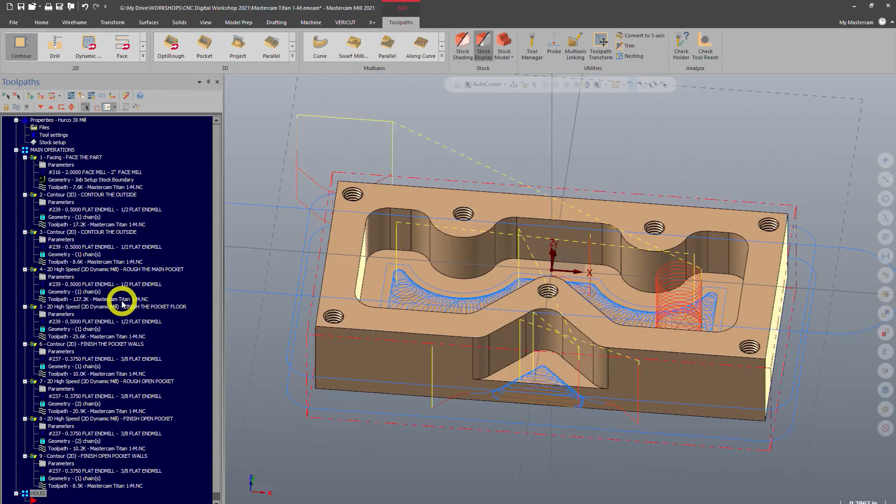The reason I'm doing this is to keep things organized and tidy, so that if I handed this program off to another programmer or machine operator, they'd look at it and know: okay, it's facing, these are the main cutting ops, and now we've got a section for the holes. It's also nice if you come back to a program you worked on a month ago—you know what everything is doing, and it's organized.

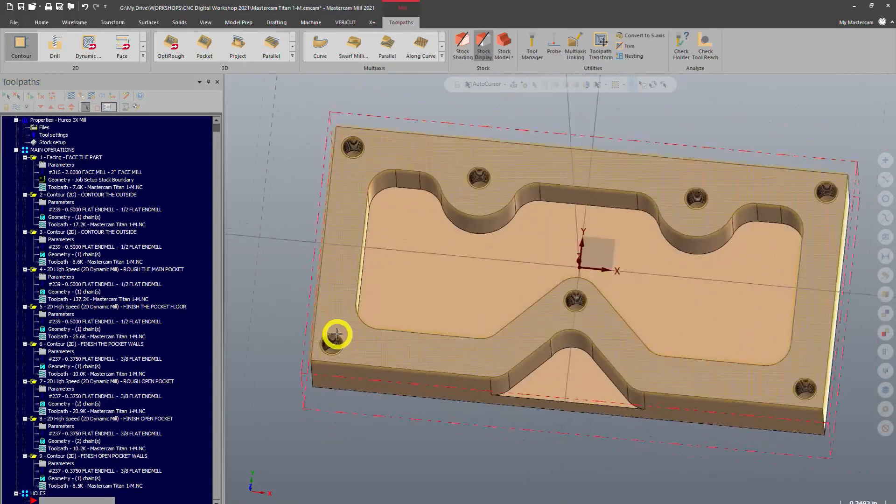So for the holes, we've got these holes over here. Based on this part model, I don't really know what these holes are or what size tap holes they're supposed to be. A lot of times you get a model brought into Mastercam and it won't even have the thread cut into the model like this. Most of the time you won't actually have threads modeled like that—you'll just have a hole.

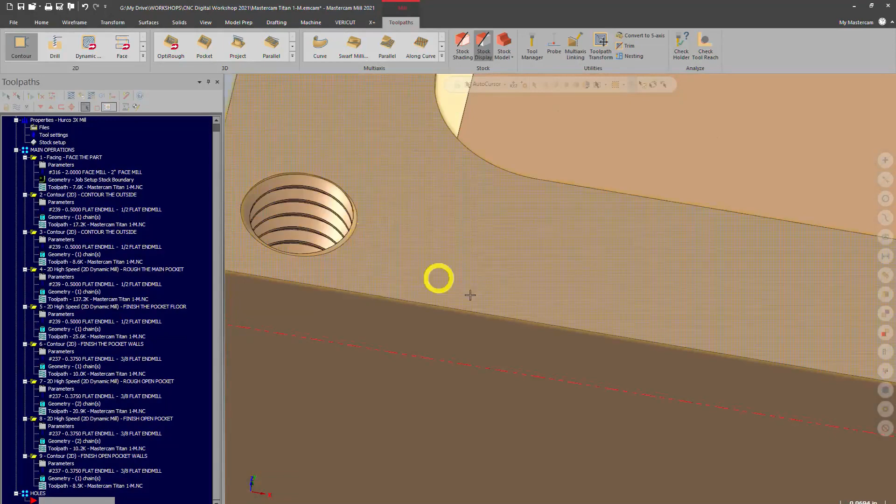In that case, it's really important to reference your drawing. We have our drawing here of the part—this is the stock page, this is a separate page calling out just the holes, and a final page calling out the pocket dimensions. Looking at the holes, we can see we've got 7 holes that are supposed to be 10-32 UNF 2B tolerance, tapped to a minimum depth of 0.380. So now I know I have a 10-32 tapped hole.

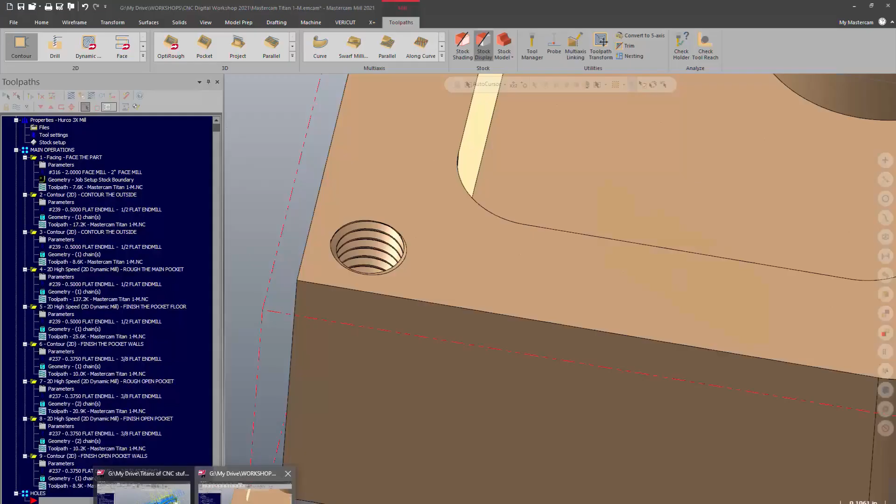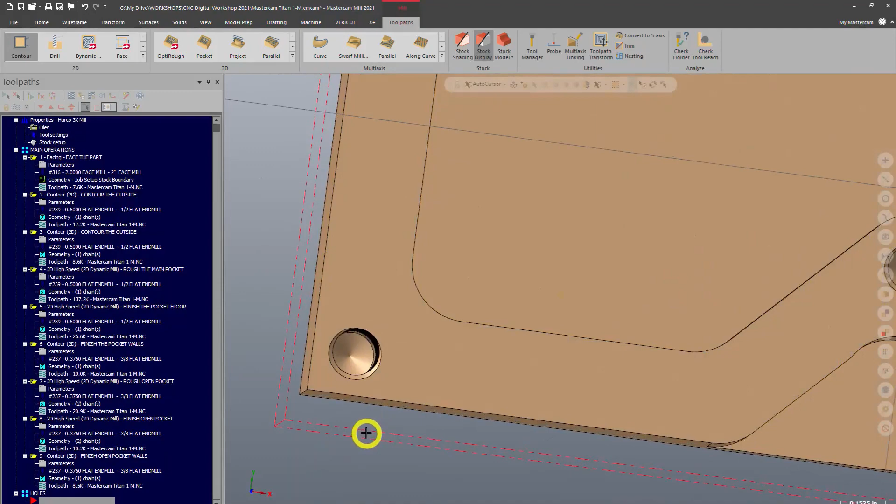There are 3 steps to tapping a hole. The first step is spot drilling or center drilling, which leaves a little V-shaped dimple at the hole entry so the drill doesn't wobble or walk. Then, after drilling the hole, you come in with the tap and tap that hole. So first we want to center drill, or spot drill, those holes to create that entry motion for the drill. Let's create a drilling operation.

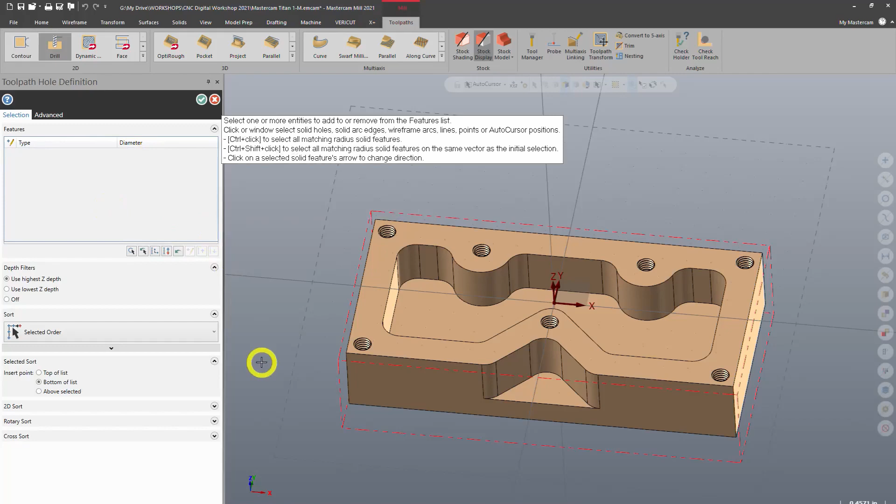This requires a slightly different selection method—we're aiming for points now, not chains. If I go down, I could drill a hole on this point, but obviously I don't want to do that. So I want to find a point at the center of this hole by going to a top view. Because this thread has been modeled into the part, I don't actually have a great point—there is one right there, but these are kind of splines, so you might not get the exact center.

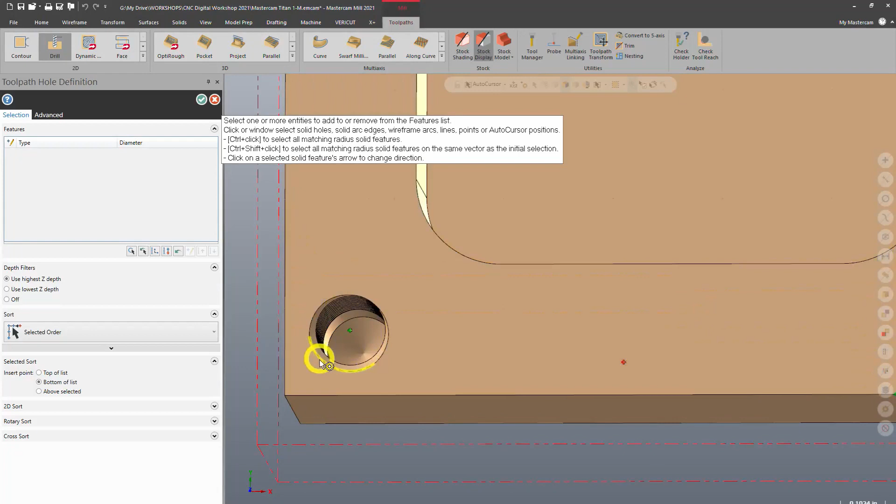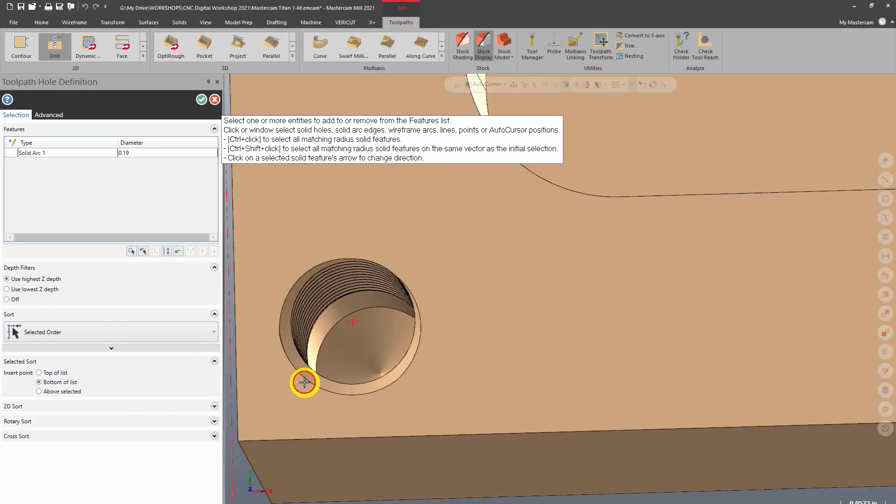A safe way to bet is to choose where you can see at the bottom here a nice clean circle. So I'll choose that point, or luckily I have found one here, so I can choose that arc. Either way will work, but you definitely want to make sure you're choosing the center of an arc. So let's go to a top view and make certain that's actually in the center of that hole.

And it is. So we're going to individually select the centers of each arc. Again, luckily we have an arc to reference. A lot of times modeled threads will not have a chamfer like this, so you won't be able to do what I'm doing, and you'll have to select that bottom circle.

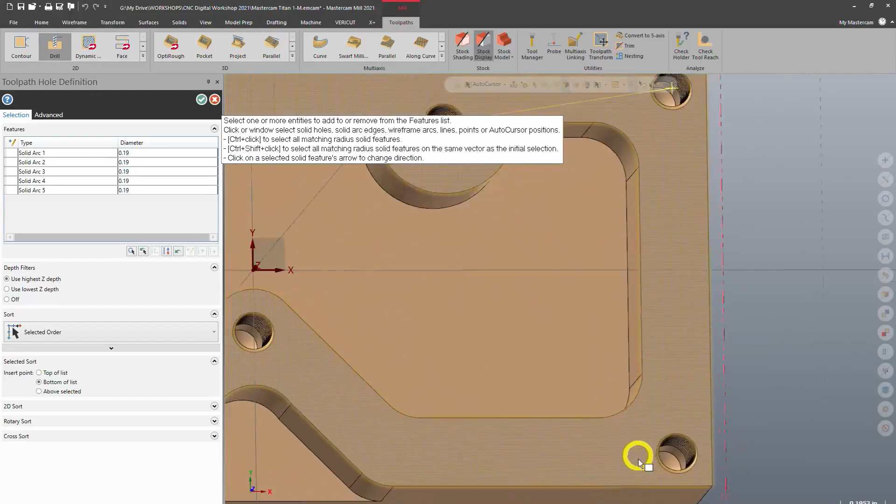So we've got all our holes selected. If you wanted to sort these in a different way, say you selected them in a random order, you can change how they're ordered here. You can have a bunch of different options. I like to select them in the order I want them cut in the first place. This is only 7 holes. If you have 30 holes, you might want to do a different selection method. Obviously I'm not covering that right now.

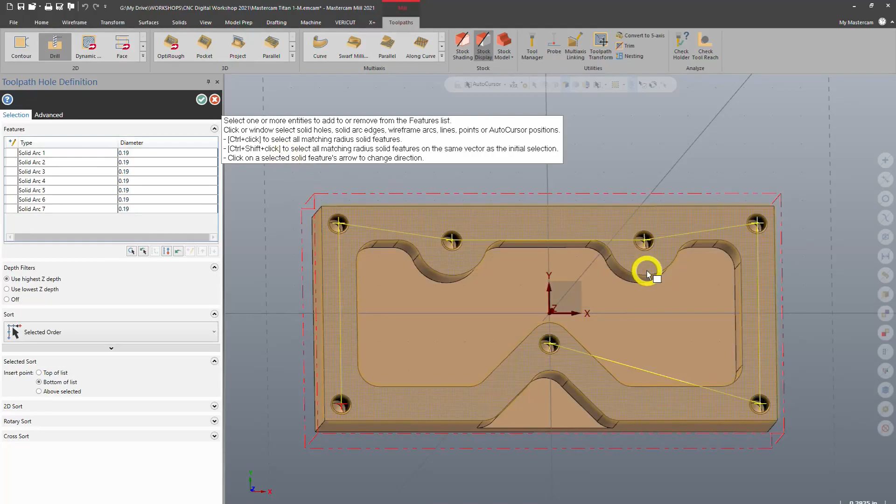So we've got these holes selected. We'll click OK, we're going into the cut parameters again. For tool, again we're not going to be using an end mill, so we're going to be using a different type of tool.

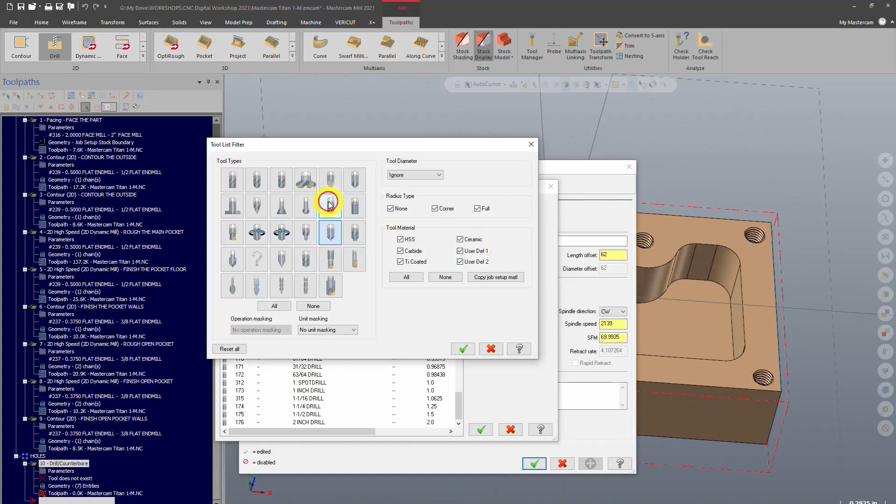Let's filter and we'll find what types we've got. So a chamfer mill, no. Taper mill, no. Spot drill, yes. You can either choose a center drill or a spot drill. I find spot drills are just easier to use, so we don't have any. There we go, spot drill. My issue here is I selected both drills and spot drills, so I'll unselect drills. We'll use a 1/2-inch spot drill.

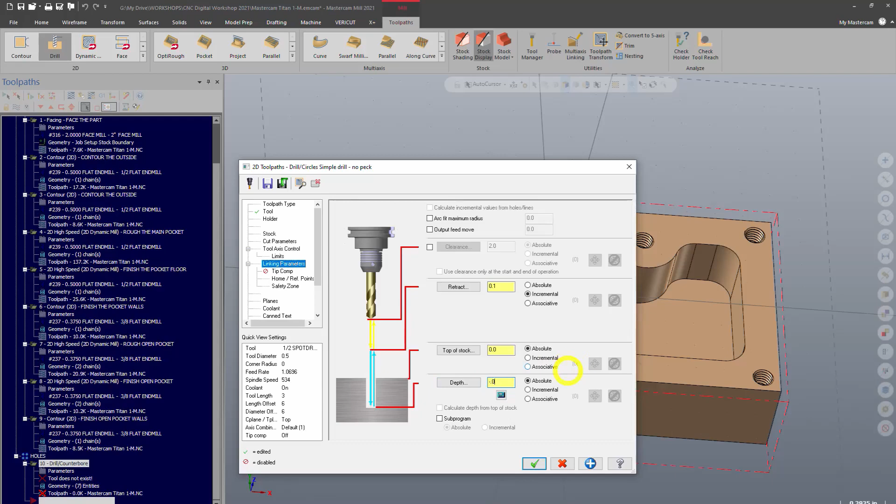And we will click and type in spot the holes. Cut parameters, just a standard drill. Linking parameters are depth. For this we'll just manually type in -0.08, and we'll see what that looks like.

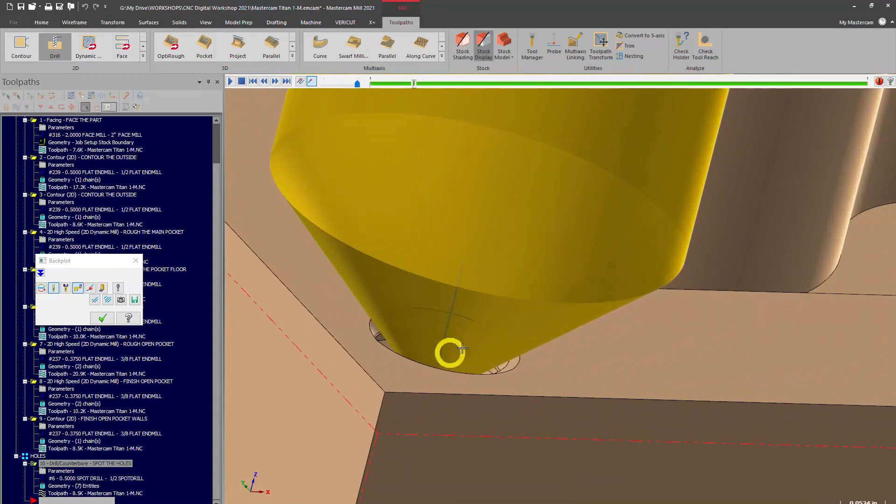All right, so let's simulate this and see. I will click the S key again and step through and see how deep that goes. So we can see we're not quite deep enough to match the edge of that, so we'll add a little bit of depth there.

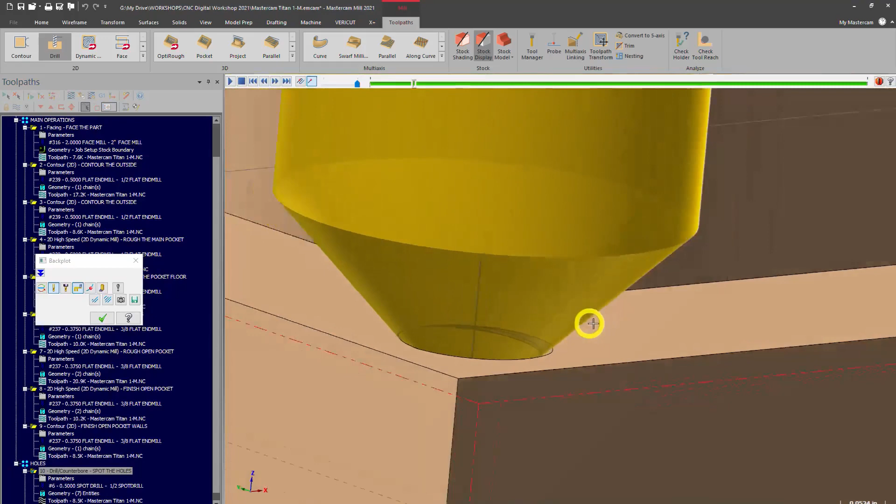Let's try -0.09. Dirty operation, so we'll regenerate, backplot, and we'll step through it with the S key again. So that's good, it's coming right down to the edge of that hole.

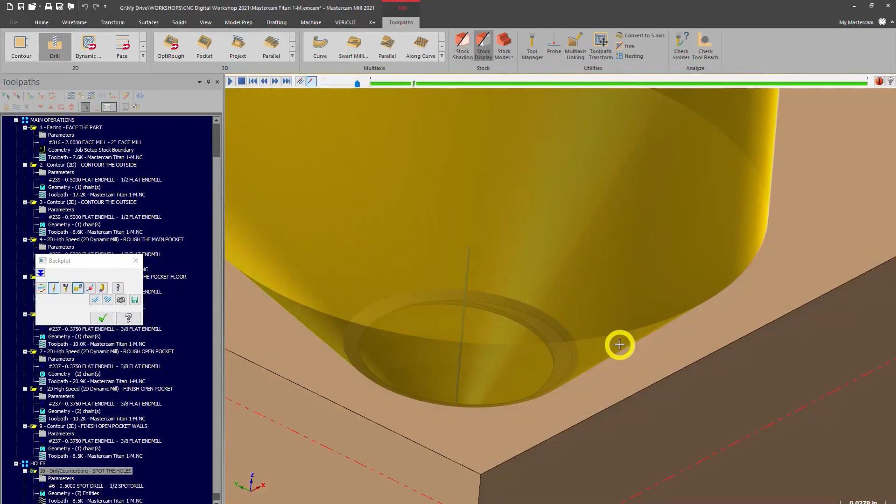You can go a little bit deeper actually, we'll go to -0.1. And what that's going to do is leave a little bit of a chamfer on that hole, which means you don't have to deburr it, and it'll look nice and clean. So we'll go ahead and continue. We've got all our holes, and we're good.

So the easiest way to move to the next operation is to just copy and paste it. So we'll hold the right mouse key, drag, copy that after, and now we're going to start drilling.

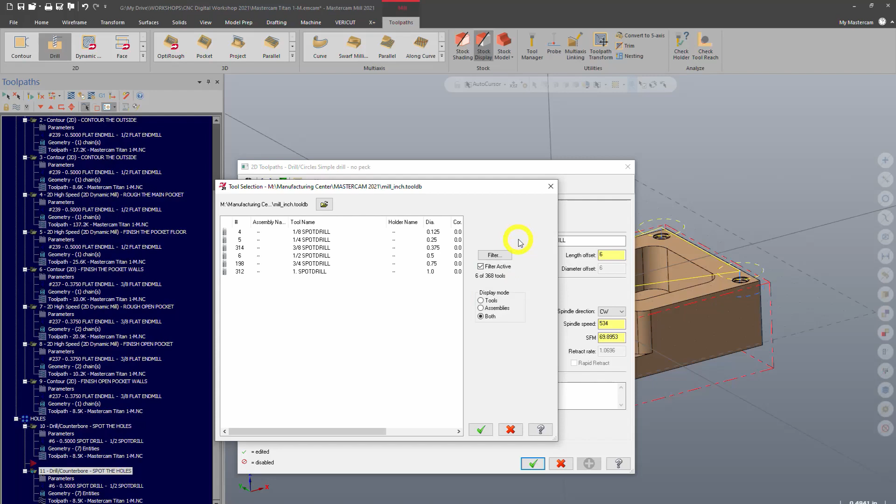So for a 10-32 hole that needs to be tapped, you need to find the correct drill. So I have a drill chart right next to me. If you don't have a drill chart and you have to thread a hole, what you're going to do is go on the internet and type in drill chart or tapping chart, and it will show you which drill you need for each sized hole. So with a 10-32 hole, I know that my tap drill size is a number 21 drill.

So we'll go and filter out only drills, and we will find a number 21 drill. And that is a 0.159 diameter.

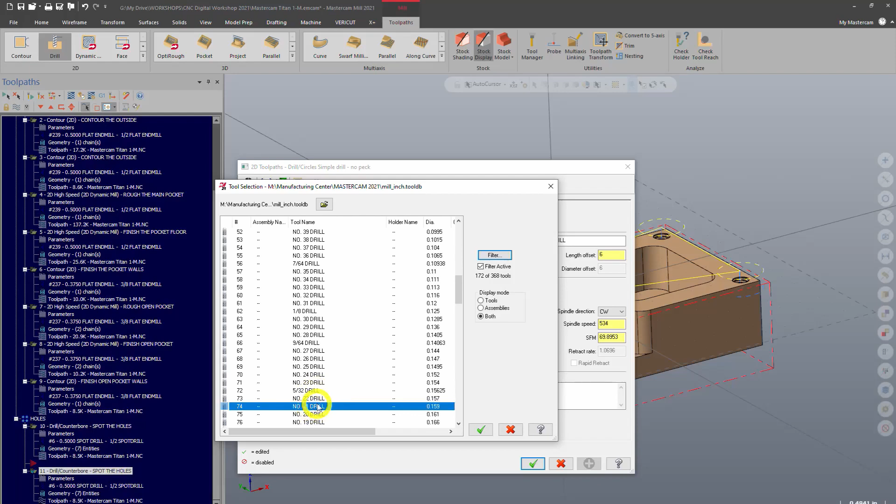So now we're going to drill the holes. And if I was really going to make this part right away, I would be changing these speeds and feeds here to standards that I know, so that I don't have to go back in and edit each toolpath to change those speeds and feeds.

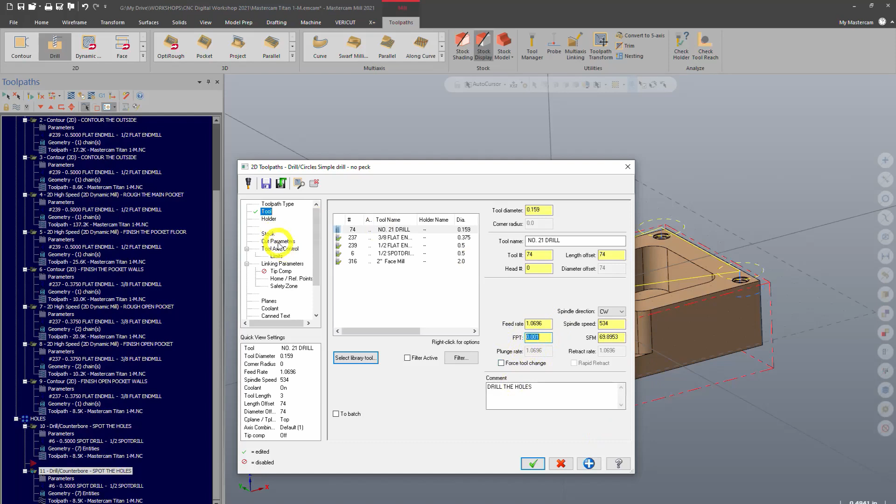They're already there. For cut parameters, I'm going to go ahead and do what's called peck drilling. Peck drill. And my peck, I could leave it at 0.1. I'm going to bring that up just a hair, I'll go to 0.2. What that's going to do is go down, drill, come out, go down, come out, and that's going to clear the chip away.

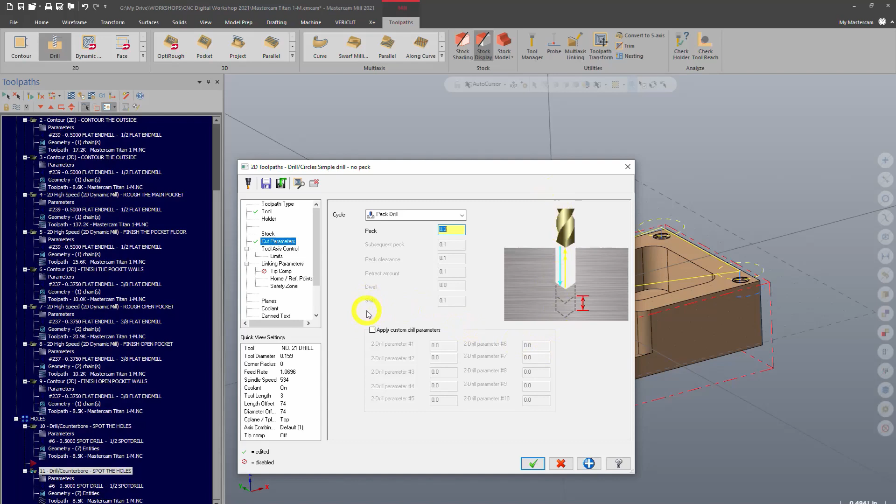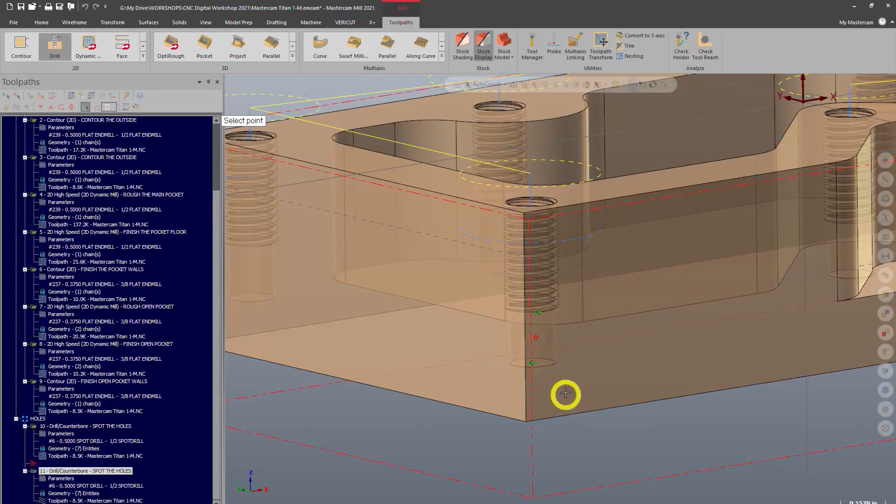Linking parameters. So I want to change that depth. If I click that button, and then click Control T, that turns off the shading, and now I can see how deep my drill needs to go. You can see how deep the thread goes, and the drill needs to extend all the way down so there's room for the tap to come in, because this is a blind hole, not a through hole. You need to extend that drill well beyond the tap so the tap doesn't bottom out. So here we'll choose that depth right there, and that depth is 0.58. We'll just go ahead and go to 0.6 and click OK.

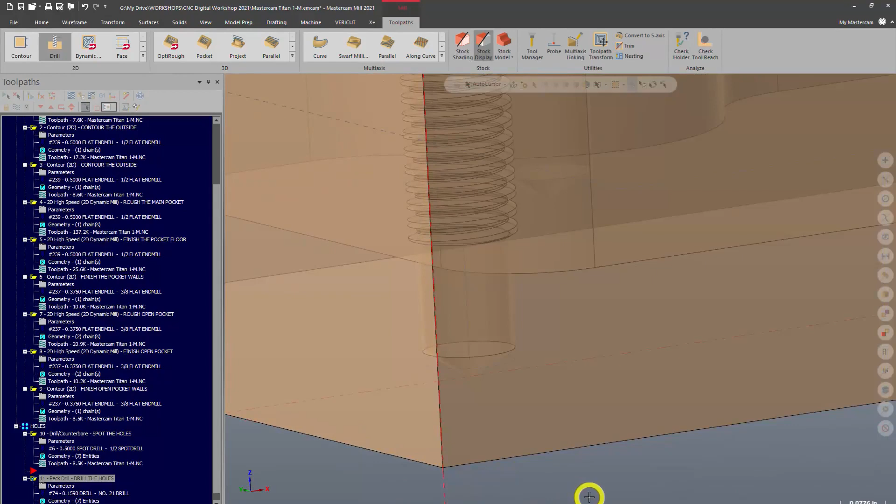Again, we have to regenerate our toolpath. And now, if we zoom in there, you can see that toolpath is drilling all the way down. And you'll notice if we backplot that and click the S key here, you've got that peck drilling action there.

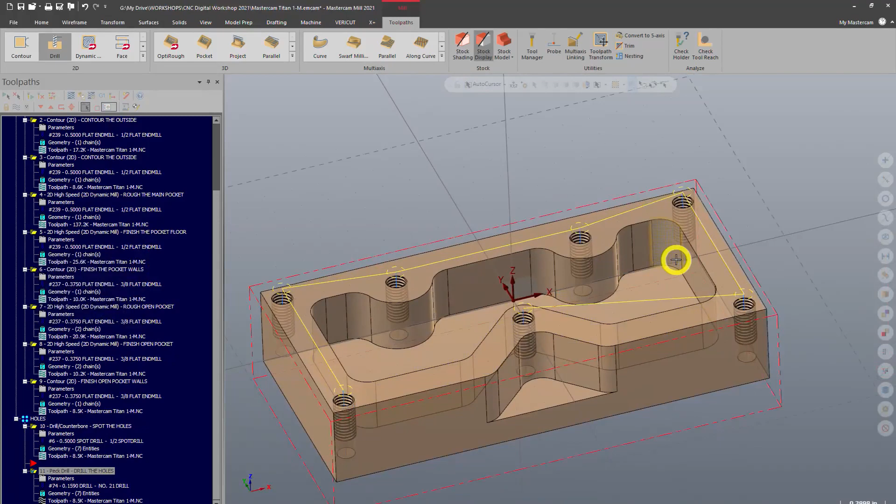Alright, so we've drilled it. Now we need to come in and tap those holes. So again, we'll copy, drag, okay, now we're going to tap it. So we know those are a 10-32 tap. We'll go ahead and choose a 10-32 tap. Filter that out. Let's see, tap, right hand. There we go, 10-32.

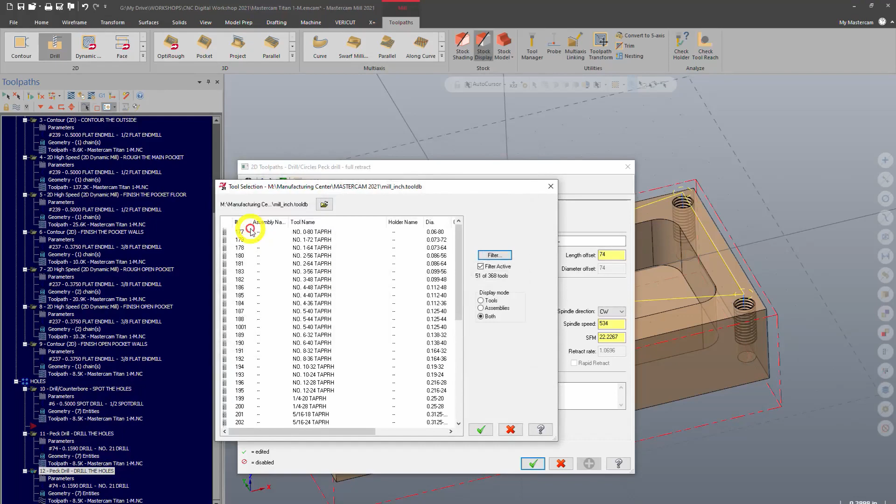And we're going to tap that hole. Now the main difference here is you really need to pay attention when you're drilling and tapping to these cut parameters. If I run a tap in a peck drilling cycle, you're going to break the tap. Taps are not meant to drill. So the way tapping works, you have a tap cycle and a rigid tapping cycle. And these cycles may not show up on yours exactly. You might only have tap, so you can choose that.

With my machine, I'm going to be running a rigid tap cycle and a peck depth of 0. So I don't want to have a peck. I just want that tap to come straight down and straight out. What the rigid tapping cycle, or the tapping cycle, does is synchronize the spindle speeds, how fast that spindle is spinning, with how fast the feed is. So you have this helix here, and the speed and the feed need to match that helix. That's why we call out a special tapping cycle.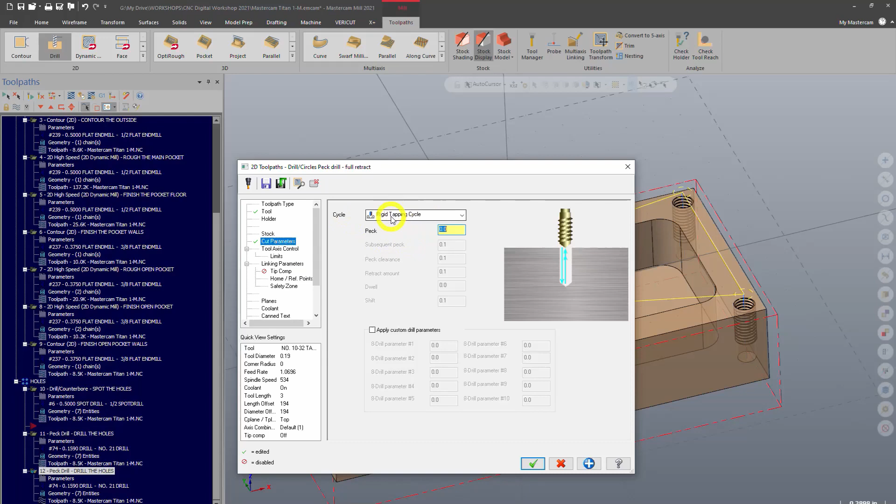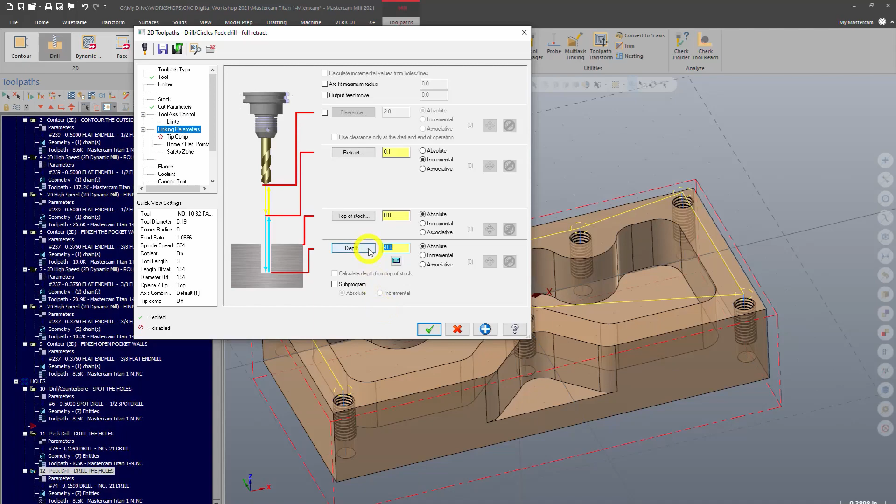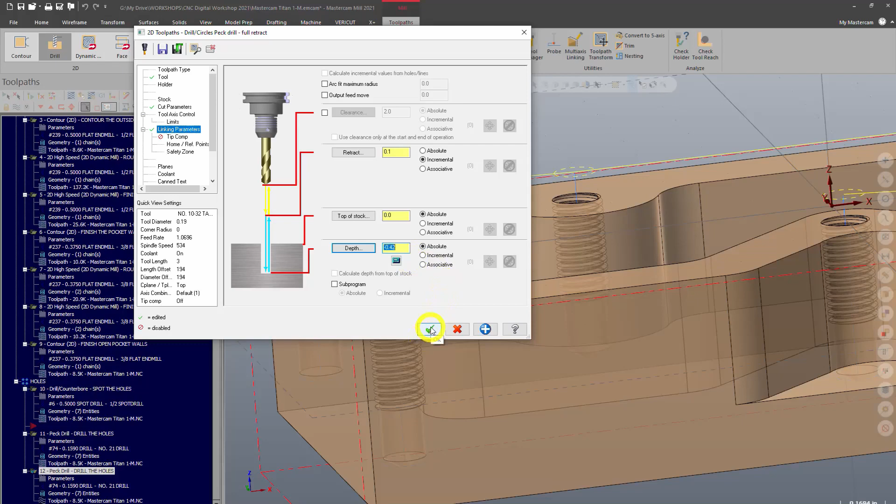For our linking parameters, we know that we need to tap. Definitely don't want to tap to a depth of 0.6, because that's going to run the tap all the way to the bottom of that drilled hole, causing it to bottom out, and you'll end up with a part with a tap stuck inside of it. So let's go to our depth selection, and we'll click somewhere right about there. We know from our drawing that we need to go at least 0.38, so somewhere between 0.38 and 0.6 is where we want that tap to be. Let's extend that down about 40 thousandths, so 0.42, and click OK.

And we will regenerate that. So now we can see the depth of our tap is right beyond the threads that have been called out and cut into the model, but not so far that it's going to bottom out on this hole.

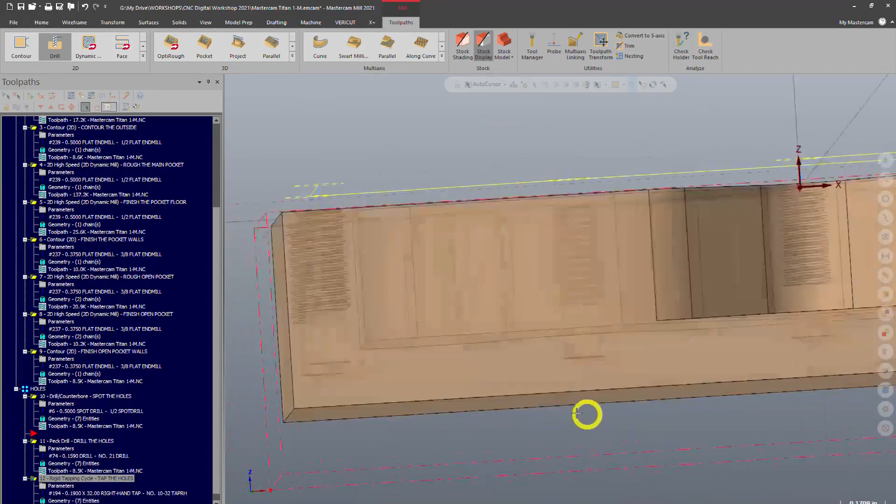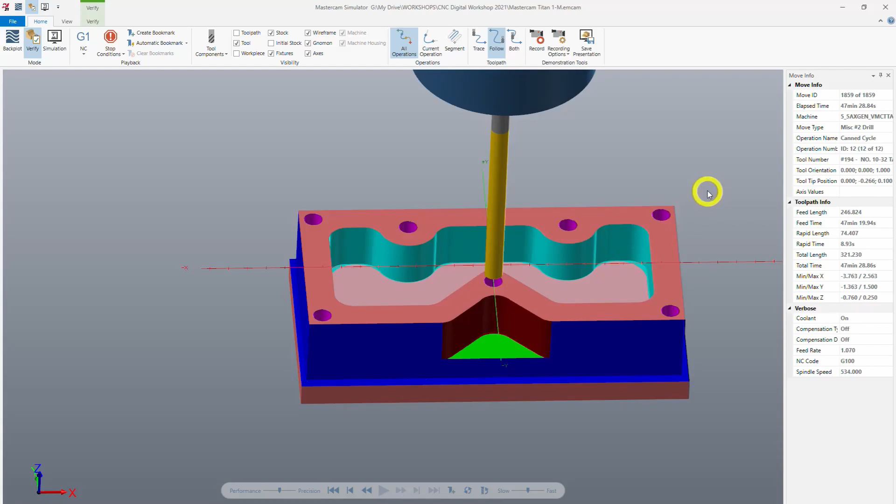Perfect. So let's run our whole machine group through verify and see what we've got. Great, so we've got our pockets done, our contours cut, and now our drill has drilled and our tap has tapped. So we've got one final step that's not necessarily a requirement, but I like to do it, is chamfering the edges of this part so that you don't cut yourself and you don't have to sit there with a file and deburr this part manually.